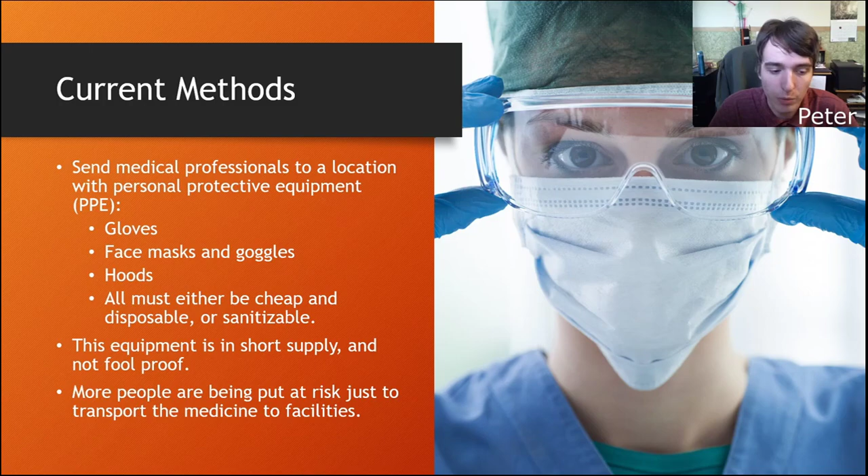So current methods involve sending medical professionals to a location with personal protective equipment. This includes gloves, face masks, goggles and hoods, and more. And all of these things must be either cheap and disposable or sanitizable for reuse. This equipment is in short supply and not exactly foolproof. More people are being put at risk just to transport this medicine to facilities.

But what about drones? Drones can be an asset to fighting COVID-19. They cut down on human contact. China has recently been experimenting with drones in order to spray disinfectants, transport test samples, and deliver consumer goods to people in quarantine like any other delivery drone.

But what if you wanted to transport something that needed to be refrigerated during a trip and monitored the whole way, like a vaccine or an EpiPen without needing the insulating case, an insulin, or anything else? This problem is what led to our project idea.

So our solution is a tiny refrigerator that can easily be lifted by a drone. In order to do this, it would need to be able to carry up to 1 kilogram of cargo, maintain a temperature of less than 10 degrees Celsius, and be able to operate off of either the drone's battery during flight or through a wall outlet after the trip.

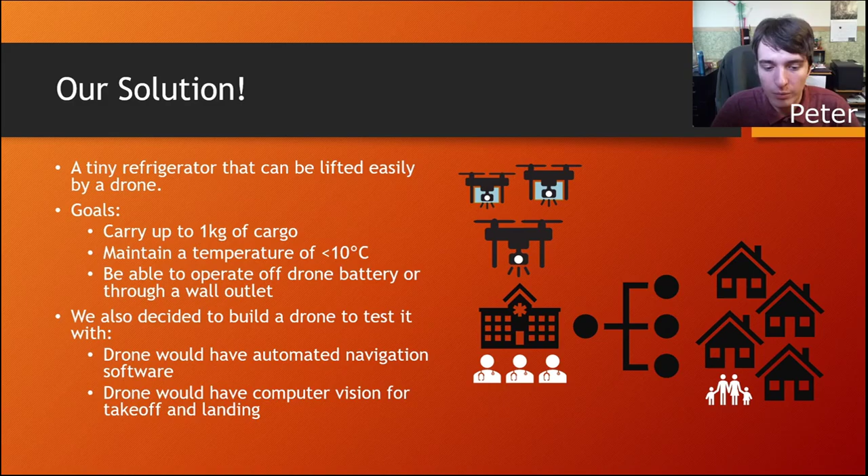We also decided to build a drone to test this with. The drone would have an automated navigation software, and it would be able to use computer vision for takeoff and landing. This is our system where we have a ground control station, the delivery drone with its computer vision system, as well as the micro fridge, which is able to be detached from the drone at any time. So let's get into the first part.

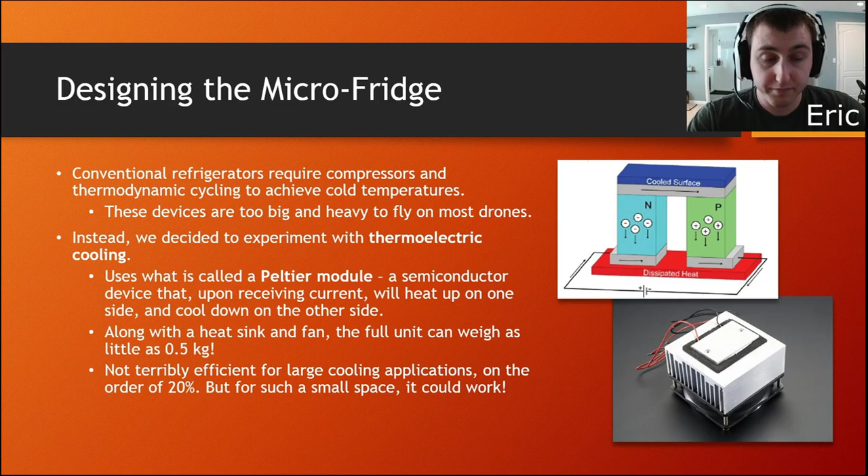Hello, I'm Eric, and I'm going to be discussing the microfridge section of the delivery drone. The microfridge is essentially needed to keep whatever supplies that are being carried on the drone cold, particularly medical supplies. A conventional refrigerator is just far too big and far too heavy to be transported using a drone. So a thermoelectric cooler was used. The thermoelectric cooler is also known as a Peltier module and relies solely on voltage and current to run. They're a lot lighter, but they're a lot less efficient.

The insulated box section of the entire microfridge was designed by Peter using styrofoam sheets. These sheets were essentially just cut in half and hot glued together to make a solid sealed box.

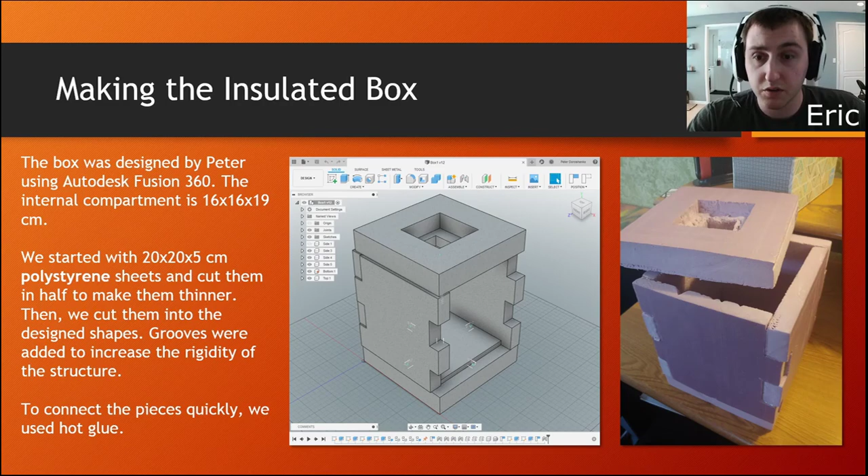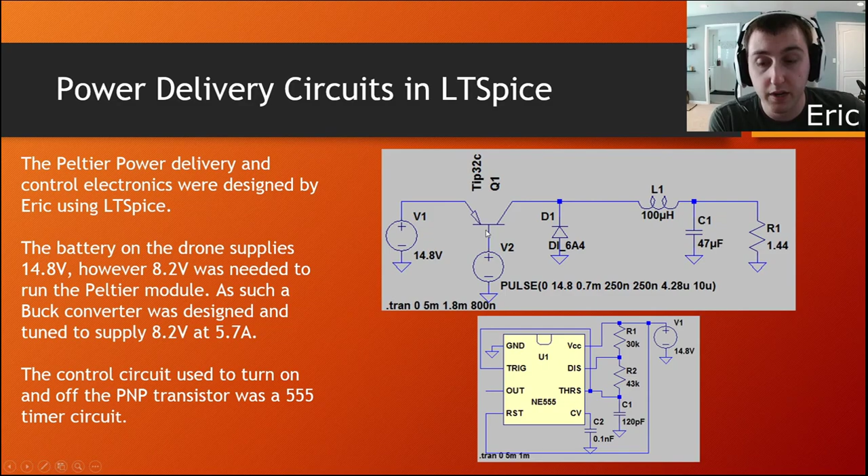The power delivery circuits were designed by Eric using LTSpice. LTSpice is a great simulating software, and we were able to develop a buck converter that can convert the 14.8 volts from the battery to 8.2 volts as needed by the Peltier module. The buck converter is controlled using a 555 timer to turn on and off the PNP transistor used. The battery, when implemented, is connected to the box using an XT60 connector from the battery to the power delivery system on the box.

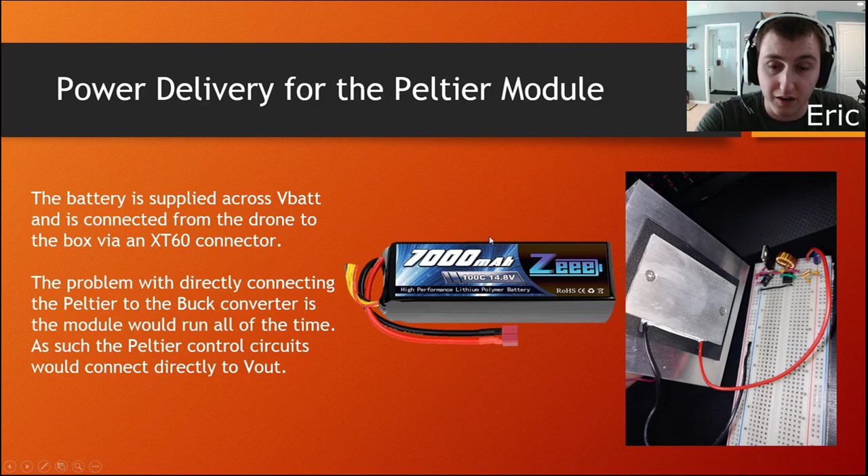As you can see, when run at full power, the Peltier module gets very cold on one side and even has frosting developing. As such, this is not desirable. So to resolve this issue, a Peltier control circuit was also needed.

A control circuit was chosen as an SCR switch that can be turned on and off using two MOSFETs, S1 and S2, where S1 turns it on and S2 turns it off. And this is controlled using an Arduino Uno, hooked up with LM35 sensors inside the box. And if it reaches above a certain temperature, it turns on, and if it reaches below, it turns off.

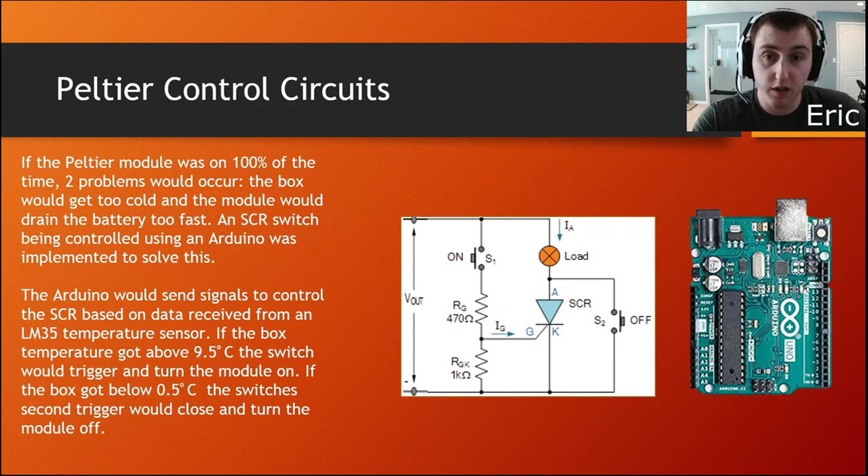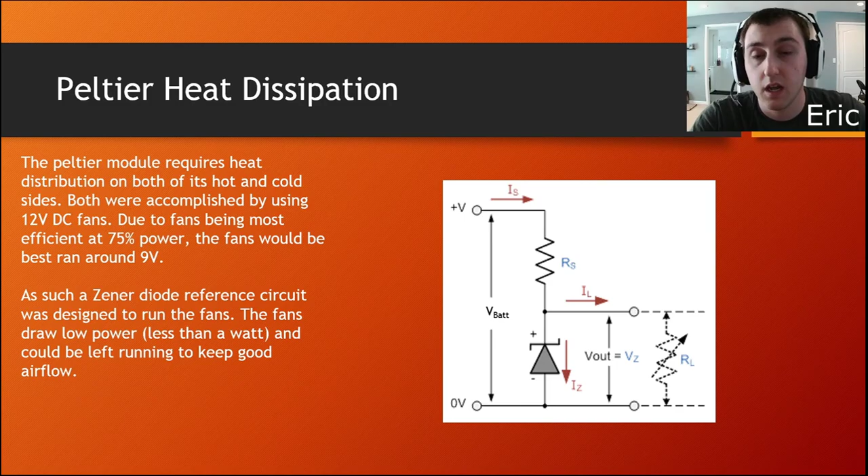Hello, my name is Alex Murray, and on this project I was responsible for the drone. When we were designing the drone, we envisioned an aircraft which would be able to carry a 2-kilogram payload, deliver that payload with a radius of at least 10 miles, and provide enough power both for the engines and for the refrigerator. Early on in the design process, we decided that a quadcopter built out of 6061 T6 aluminum using an H-frame would be the best design decision to meet this challenge.

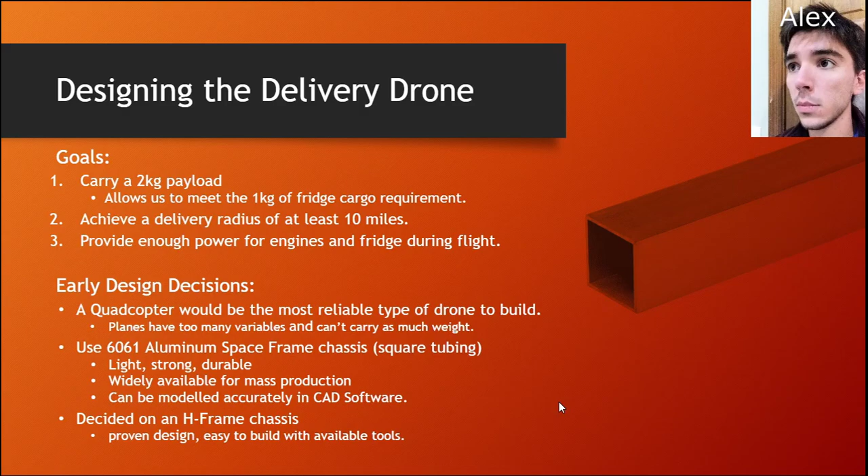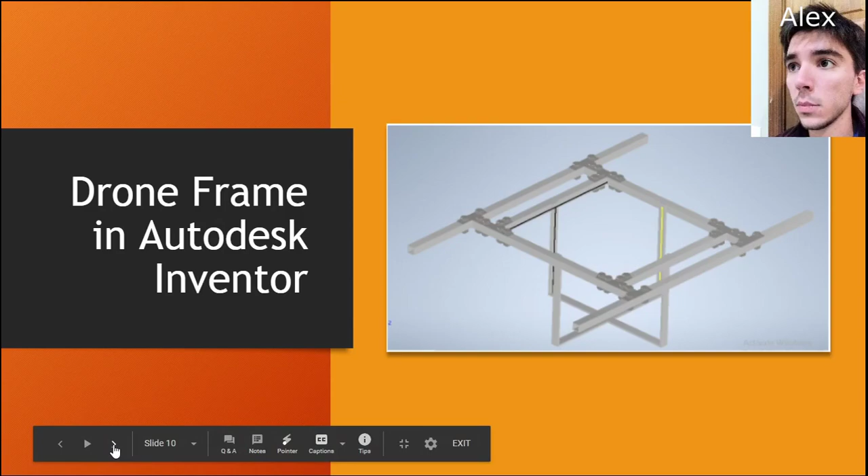Autodesk Inventor was used to design multiple different versions of the airframe itself and test this airframe under the maximum predicted operating stresses to verify it would be able to withstand them.

Once the chassis was designed, the next task was to determine the appropriate power electronics, engines, and propellers to use. In order to make this decision, manufacturer data and manufacturer thrust data was used. Eventually, we decided to use the APC 10x4.5 propeller with the Cobra motor.

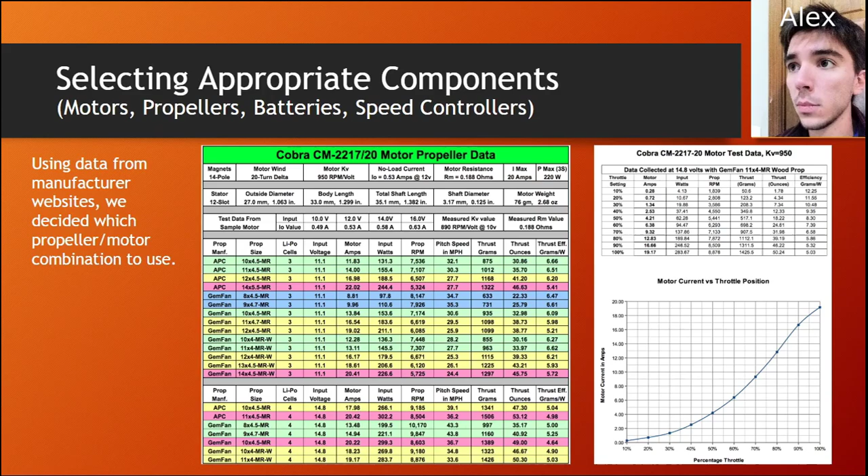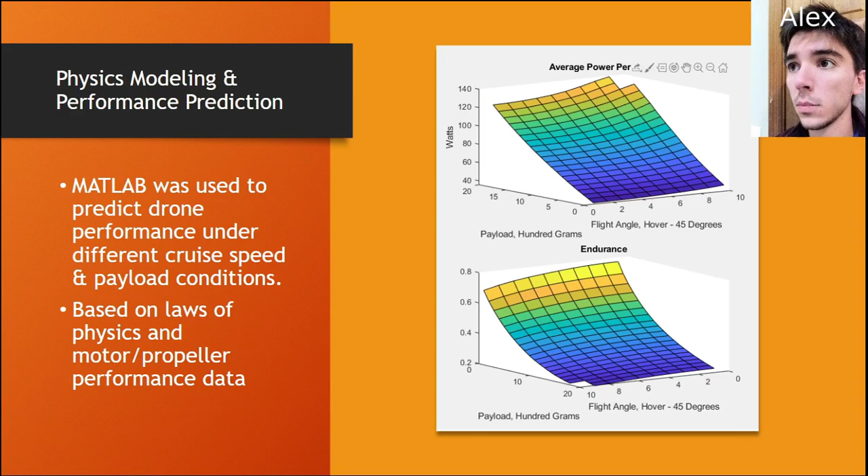Once the engines, propellers, and chassis were designed, MATLAB was used to predict the performance of the drone based on the laws of physics and on the published motor and propeller data. The next step was to actually program the flight control avionics.

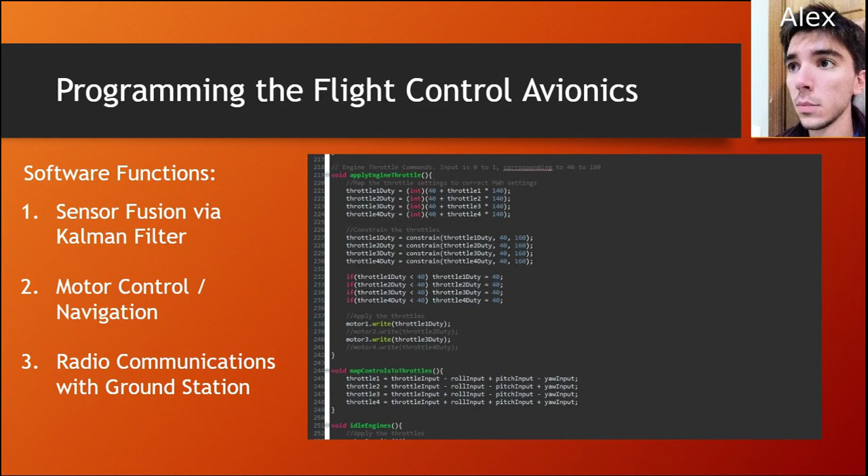On board the drone, a Kalman filter is used to fuse data from an accelerometer, gyroscope, and magnetometer in order to estimate the drone's orientation in 3D space. Then, a PID controller, proportional integral derivative, is used to perform navigation tasks and apply throttles to the motors as appropriate. Finally, the software had to manage telemetry and communications with the ground station.

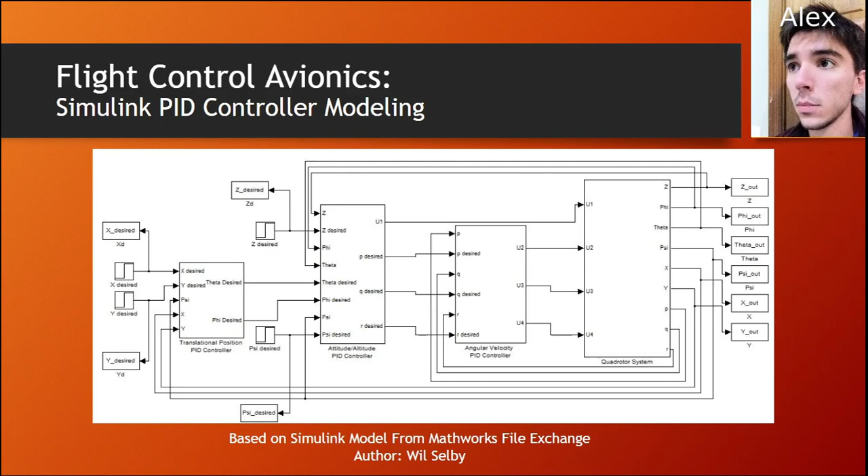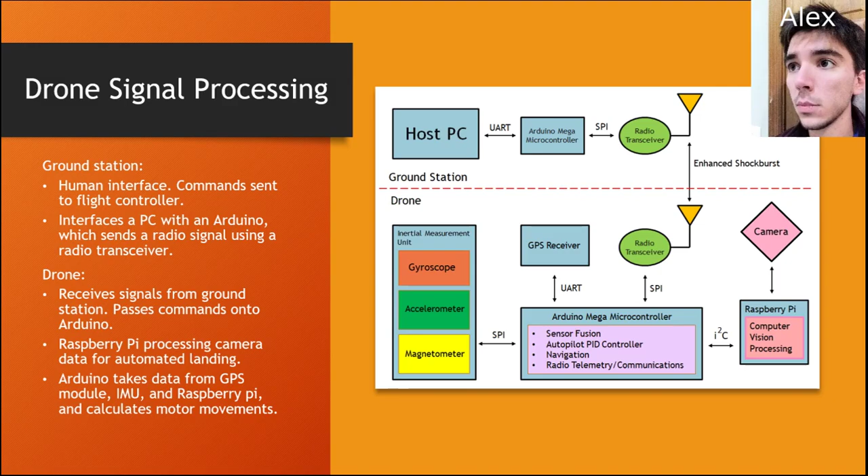Once at the drone, the Arduino Mega microcontroller onboard the drone receives this data and, together with the onboard PID controller and Kalman filter, determines the appropriate signals to send to the motors. In order to actually build the drone, some tools were necessary. A machine shop containing a milling machine, drill press, and bandsaw were used to fabricate the elements of the drone chassis as well as the drone brackets.

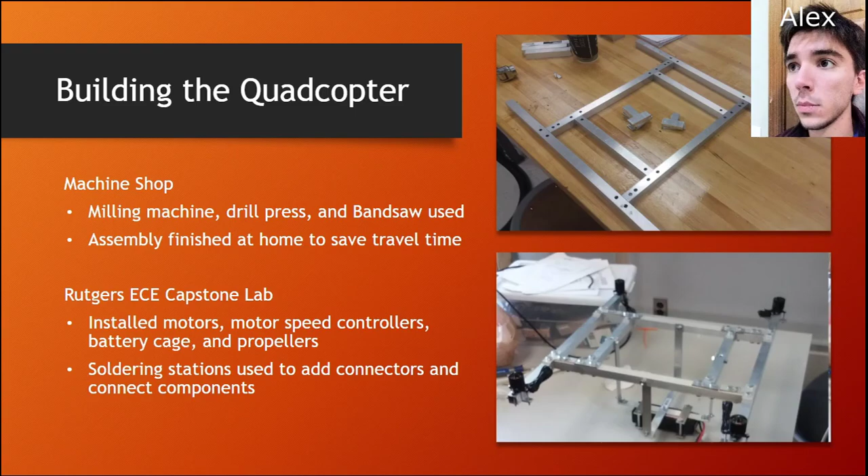The Rutgers ECE Capstone Lab was used to install motors, motor speed controllers, battery cage, and propellers. In addition, the soldering stations in the lab were used to assemble the wiring harness. Once the avionics power electronics were installed and the chassis was completely assembled, it was time to do some testing. It was necessary to test the drone in order to calibrate the autopilot and confirm that the Q and R values for the Kalman filter were correct.

In order to do this, a rudimentary single-axis gimbal was built and used quite thoroughly in order to calibrate the autopilot on both the roll and pitch axis. In addition, the proper functioning of the radio telemetry system was verified in order to ensure safe operation.

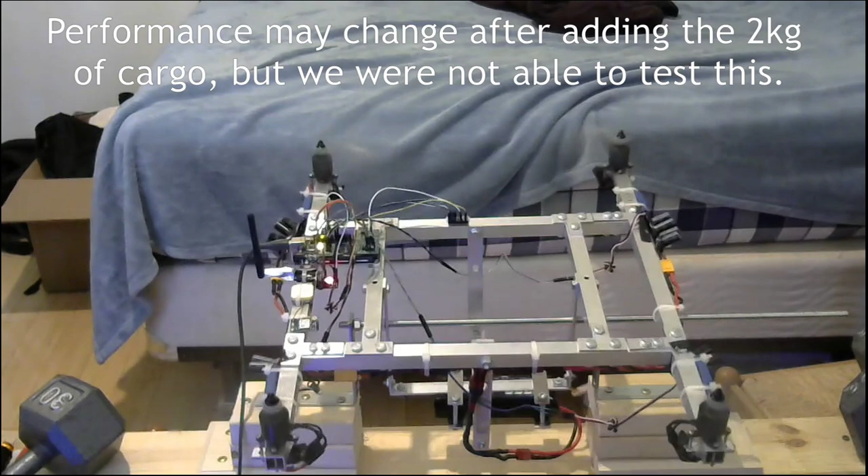Unfortunately, disaster struck, and we were not able to fly the drone in time for the expo. An electrostatic discharge event, which occurred about a week before Capstone Expo, destroyed the IMU, which contains the accelerometers and gyroscopes. This rendered the drone unsafe to fly. Due to shipping delays associated with COVID-19, a replacement IMU unit could not be procured in time.

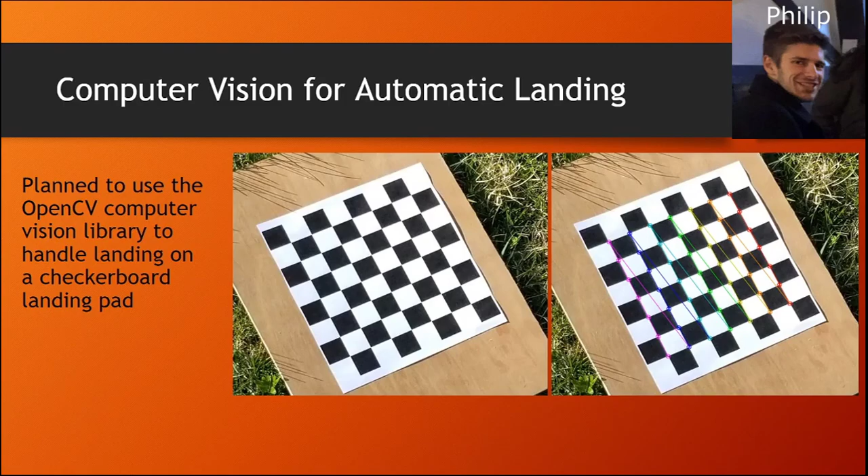Despite this, we were able to cause the drone to hover with stability on the testing rig. An important lesson was learned from this failure: always have backups of critical parts. For the automatic landing, we plan to use the OpenCV computer vision library to handle landing on a checkerboard pad, like so.

For the object detection, we were planning on implementing a pedestrian detection algorithm to give the drone an unobstructed path from its start point to its destination, thus avoiding any collisions with any people and hurting anyone or damaging the drone.

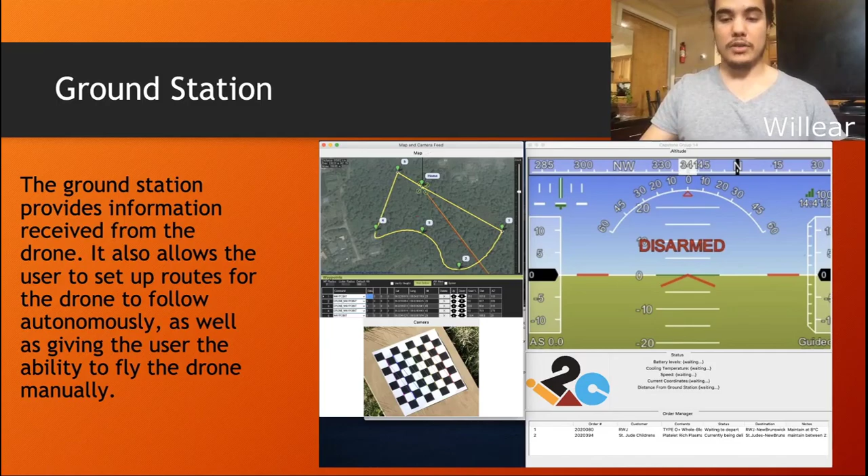The ground control station provides information about the drone to the user. Information such as the battery levels, the cooling temperature, how fast the drone is traveling, and the drone's current location. It also allows the user to control the drone either autonomously or manually. You can also add the routes for where you want the drone to go and things like that.

The format and communication: we wanted to format it similarly to TCP, used for internet data transfer, with a send message and an acknowledgement message. The ground station would send a message requesting data from the drone, and the drone would acknowledge that specific request number with the data that it had requested from it.

The closing of campus due to COVID-19 meant that we could not fully implement our project. We were planning on integrating the computer vision and remote flight control software into our drone. We were planning on testing the Peltier cooler with the battery, and housing the Peltier cooler into the insulated box and recording data for the cooler's efficiency.

But considering the limitations, we achieved a lot. We have a nearly flight-ready delivery drone, despite some complications. We have a Peltier cooler proven to work with our power electronics using a plug-in power supply. We have early computer vision and radio connections. And we have basic flight control and communications software. We believe that with further work, our system could rapidly deliver refrigerated medical and non-medical supplies to people in difficult-to-reach locations.